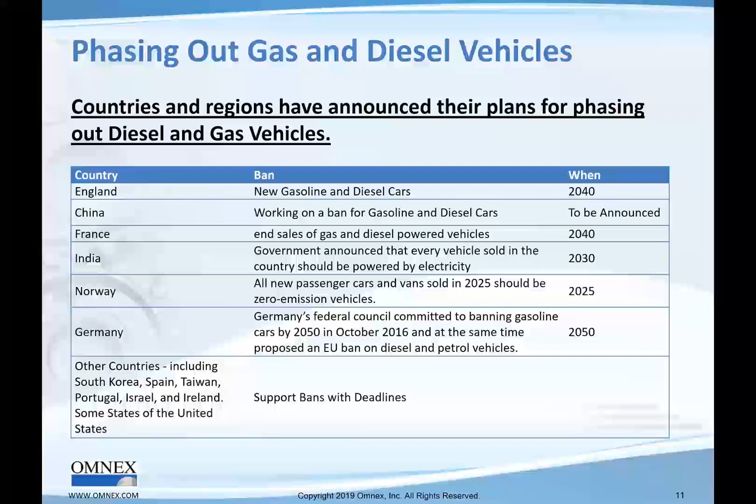Well, if that's all there was, it would be fine. But here's news from the 2 largest car makers in the world: GM has announced it's going all electric, and they will give up, as they say, ditch gas and diesel powered cars. We hear that from Volvo, we heard that from Porsche, we heard that from Volkswagen. So the 2 largest, GM and Volkswagen, say the next generation of combustion cars will be its last.

And by the way, where are we at? Yes, GM has a few, 2 electric vehicles, but they're planning on bringing out 20 new electric vehicle models by 2023. And they're trying to conserve their cash because they're going to have to put all this money into where they see the market is going. What then about autonomous?

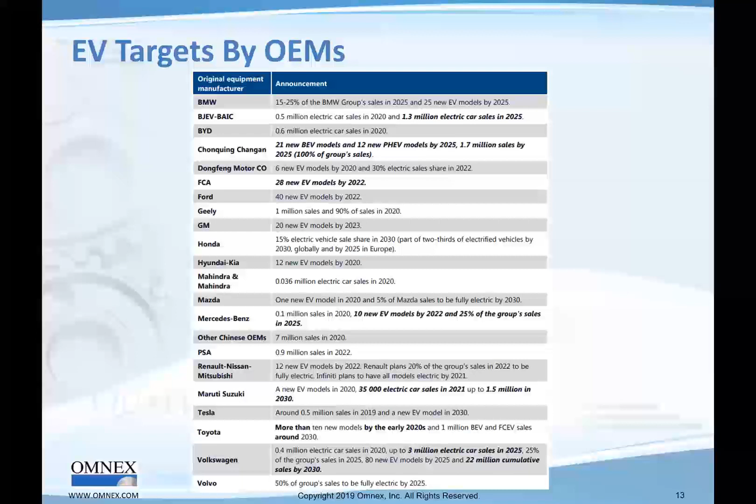Well, let's hold off on that, but let's keep that in mind. What is going on in autonomous cars? So before we go there, what's been happening in the automotive industry currently and the last, let's say, 10 years is that mechatronic systems, electronics and electrical functionality has been added, and a lot of safety functionality has been brought in.

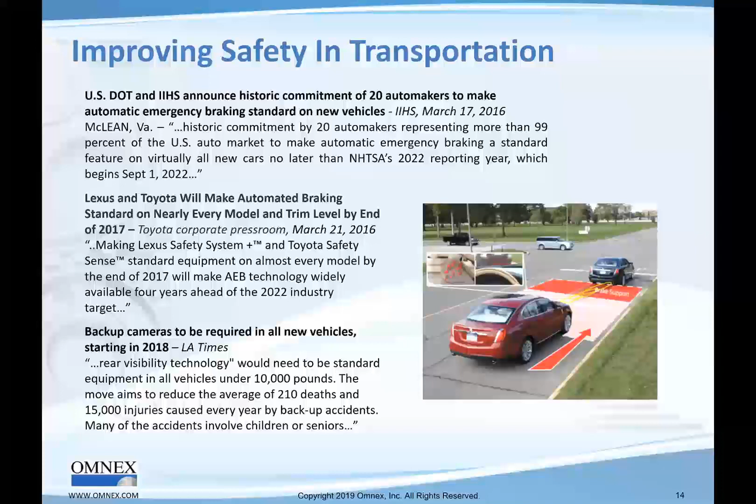This led to the announcement in 2016 between the U.S. Department of Transportation and 20 automakers that they'll bring in AEB, automatic emergency braking, and backup cameras so that cars don't injure children or seniors. In fact, I have a slide a little bit later looking at the path to autonomous cars. That path actually starts with this incorporation of electronics and safety product functionality into the car. So keep that in mind as I move forward.

So, of course, going hand in hand with that, with this idea of bringing in technology, is the big shift from 2020, where the electronics and software is, let's say, 35% or 33%, all the way to where it hits 50% by 2030. And that's a whole bunch of billions of dollars that'll get added to electronics and software sectors of the market. So if you're still designing mechanical products, that part of the market is going to shrink. You're still going to need some mechanical product for electric vehicles and autonomous, but more than ever, we need to bring hardware and software design into our organizations.

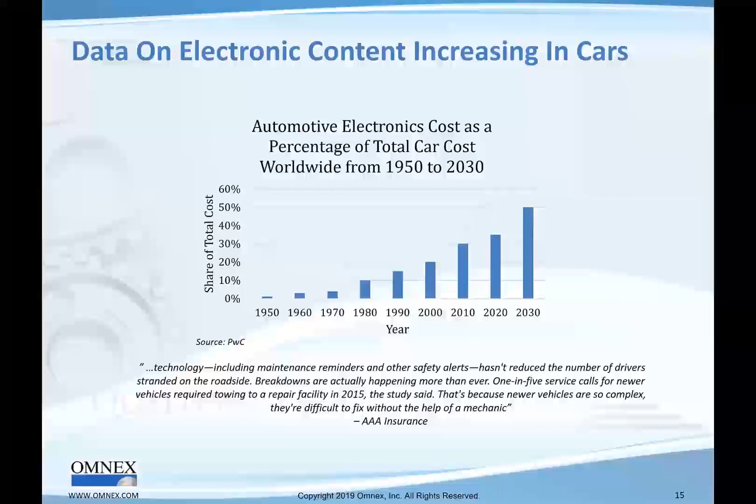Those of you listening, if you have been brought up in mechanical systems, we need to make a shift into understanding how software works and hardware works. I don't know if I'll get a chance to say this... well, let me see here. I do get a chance to talk about software, I'll say it then. So as you might imagine, the warranty recalls in software have gone up.

In fact, recently I worked with one of the truck OEMs who told me they're seeing 50% of their recall and warranty being software as a root cause. That's why we said in the paper 15 to 50%. So we're not doing such a good job incorporating hardware and software, and especially software.

So I'll say it now. It has been my experience, since the mid-2000s, in the companies that I work with — I may or may not have told you, Omnex played a big part in the ISO TS 16949 version for the semiconductor supplement, and because of our involvement with SAC, we did a lot of work in semiconductors and high tech — I noticed groups of software people often excluded from audits.

And then we would audit them and find out they had no quality management system. Of course, that's changed since 2006.

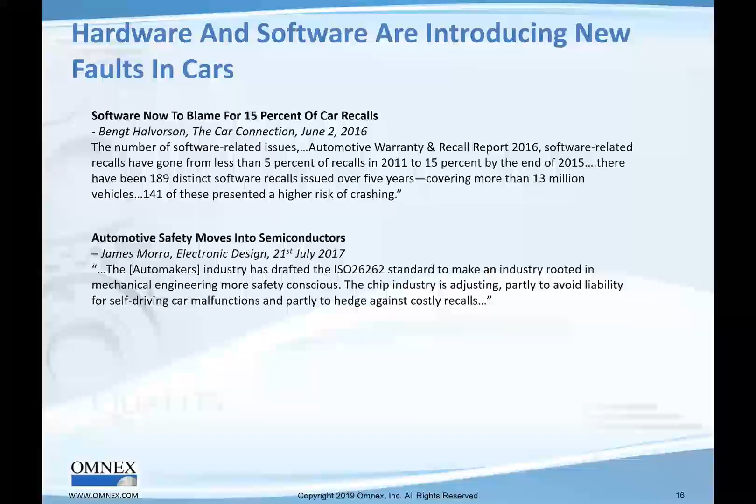Software now, the software part of the organization and the hardware part of our organizations are growing in leaps and bounds, especially software. I'll tell you about software and autonomous cars in a little while. But let me just say that with this growth in software, we're still treating software as a stepchild outside the realm of how we do new product development. So there's a long way for us to go in terms of integrating software, hardware, and systems.

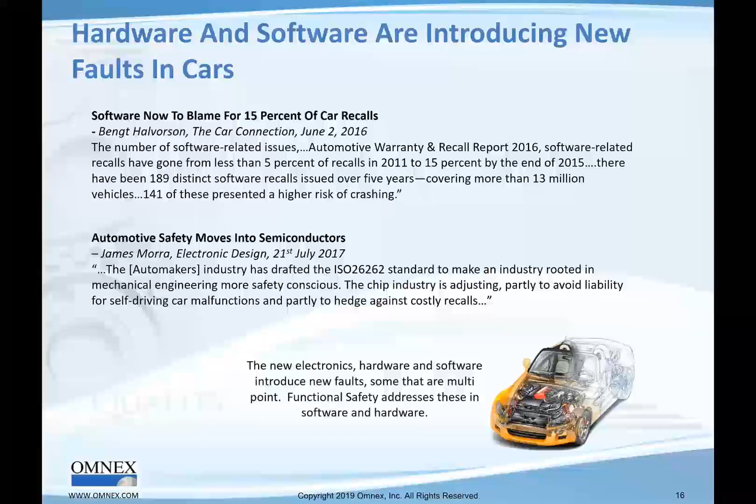All right, what can we say? There is an evolution from electric to autonomous. Forget exactly which article I talked about, who are the leaders right now in going towards autonomous. Of course, Tesla gets a lot of press, and so is General Motors' Super Cruise. It's doing wonderfully well on the highways, but they're doing it on a gasoline engine, and of course they're going to have to move that to the electric vehicle. We're all going to go autonomous on electric vehicles in the future. So there will be a shift from electric to autonomous.

Once we hit level 4 and level 5, there will be a shift to what is called mobility as a service, which is the Ubers and the Lyfts, which will gain importance. There's a thought, not just a thought, it's been there for a while, that there will be a shift from people buying cars to people using cars as needed. The idea is cars are available for 24 hours, but typically most of us who use a car daily use it for 1 or 2 hours at the most. So the idea is using the car the other 22 hours — when cars completely go autonomous, all of us will call a car to our doorstep, take a trip, and then it'll go wait for somebody else to use it. That market is called mobility as a service, and it's projected to be $1.5 trillion by 2030. By the way, there's an increase in revenue.

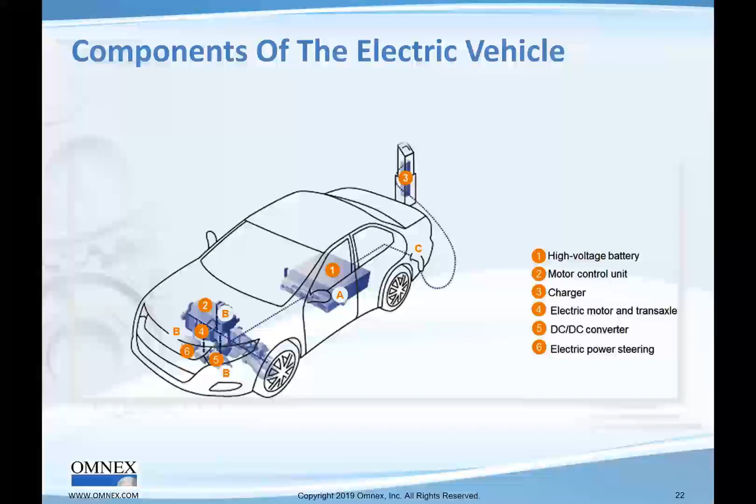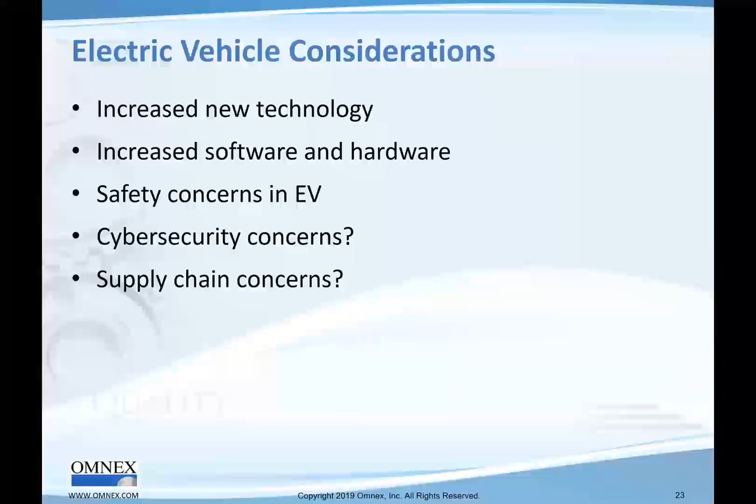So what are the EV basics? Number one, this is a high voltage vehicle with a high voltage battery, motor control unit, charger. Remember the chargers outside need to be all over, everywhere, so we can go charge it. And what does it bring in? It brings in its own considerations - new technology, increased software and hardware, safety concerns, cybersecurity concerns, supply chain concerns. So there are many different things that we didn't have before.

Could the electric vehicle have unintended acceleration? Yes. Could it have a shock, because it's high voltage - if you had an accident, the chassis could get in touch with the high voltage system and somebody could be electrocuted, or just by some bad design, the battery could end up electrocuting the driver. Or combust - explosion, battery fire, and so on. Of course, you can still have brake failures.

The big concern also is sudden deceleration. Is sudden deceleration such an issue? Yes. If you're going on the highway and you suddenly decelerate, somebody could come and hit you. It's what we call an ASIL C or ASIL D event.

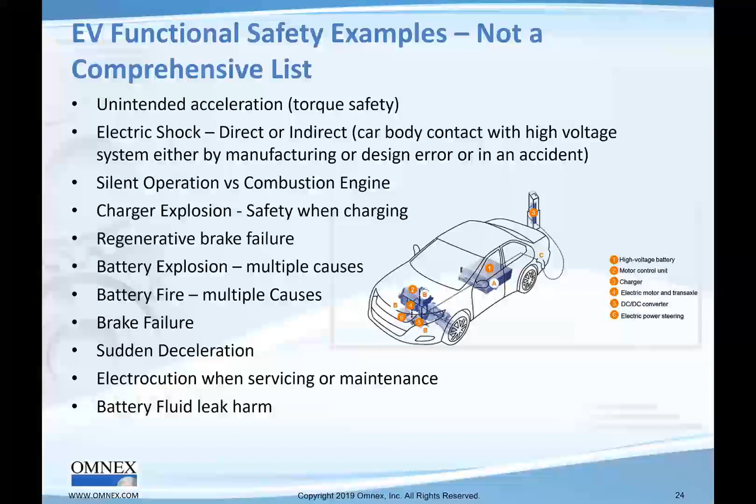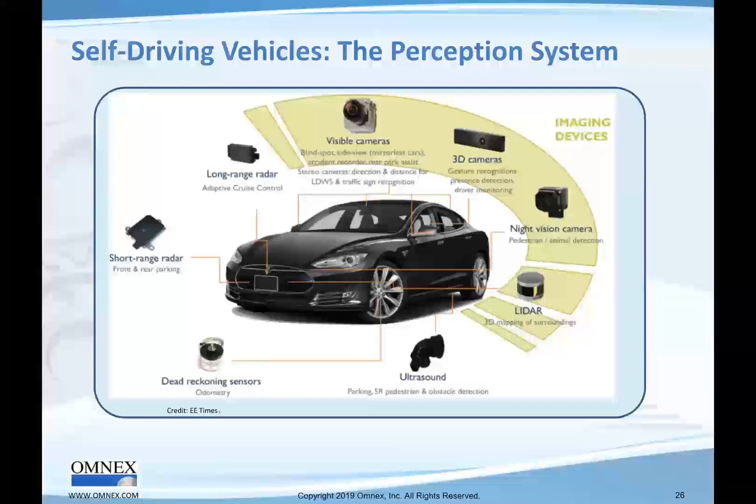So there's the electric vehicle. All future vehicles will be electric vehicles, and autonomous cars on top of that. What about the autonomous car? Lots of different cameras, sensors, radars, ultrasound. Why? Because a self-driving vehicle needs a perception system.

Right now, we are seeing people trying to come up with level 3 cars. I'll explain level 3 and all these in a second, but let me talk a little bit about the difference between level 4 and level 5.

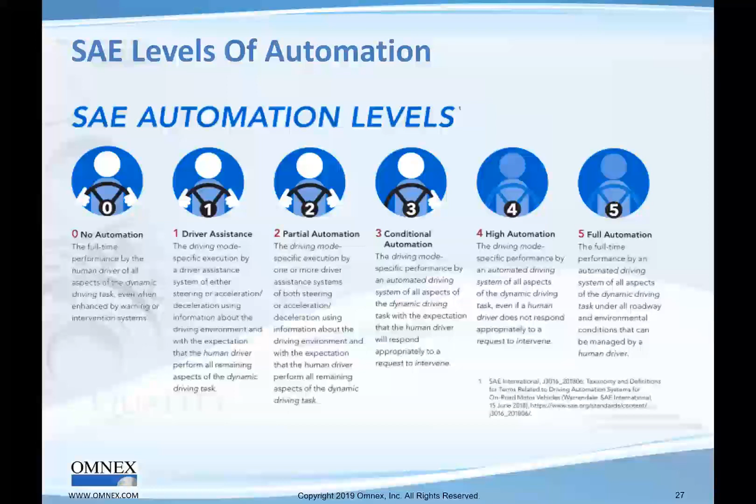When there's a problem, level 3 will go to the driver. So it's drive mode specific performance by an automated driving system, and if there's a problem, it'll ask the driver to intervene. You could say the highway driving of the Cadillac with Super Cruise is a level 3.

The difference between level 4 and level 5 - you can see level 4 and level 5 look the same, but it's some versus all. That's the big difference, what they call operational ODDs, operational design domains, which means level 4 vehicles are under a very specific scope, meaning it's maybe just highway driving, or taking people around a route in a university, or inside a mall. All that is level 4 if it's completely automated.

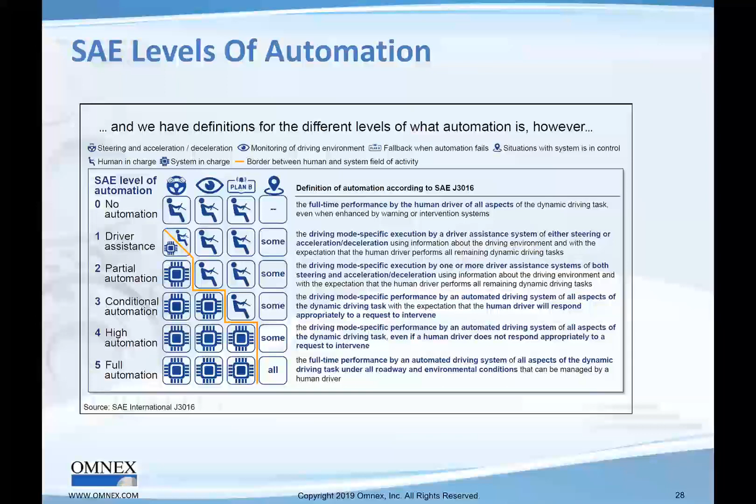So airbags can injure people and so on. And of course, there's the danger of collision from behind. That's the challenge of going from level 4 to level 5.

Look at the amount of automation - sensors, radars, cameras, 28 to 32 for level 5. And as you go further in terms of a car being able to see everything, can you imagine the amount of software we need? So people are using machine learning and AI for capturing scenarios and telling the car what to do. And of course, there's an infinite number of scenarios.

I guess what people are arguing is that as long as you get the autonomous car safe enough - meaning safer than current safety levels - then you can start going to level 5, even though level 5 is not perfect. I could talk a little bit more about that in terms of what people are seeing.

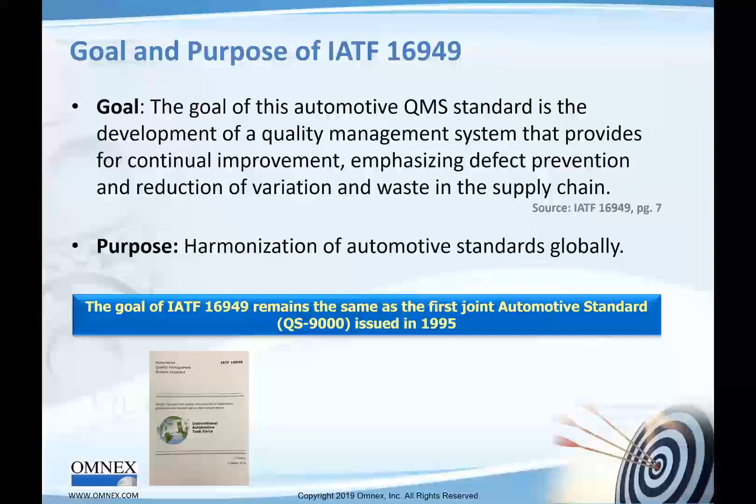The V model needs to come in. Several new changes need to come in, not only the IATF 16949, but the APQP and the PPAP need to change. The FMEA has already changed to the AIAG-VDA, and we'll mention the AIAG-VDA is a methodology that really supports the system structure. In systems engineering, the system hardware software evolution in terms of design.

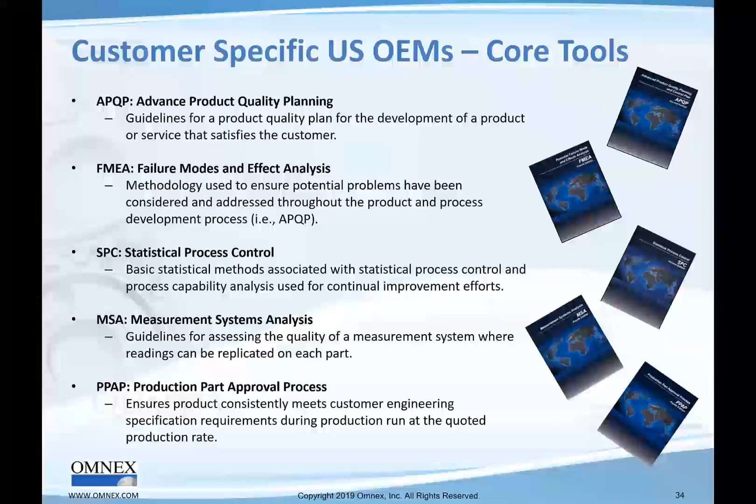Keep that in mind when you do AIAG-VDA and any of these other standards. You have to change the way you do design, and you have to structure your design. All right, let's go on.

I'll just mention also the PPAP. It's very old. It was formulated before 1995, actually. Okay, and Ford's ISIR became PPAP, the production part approval process, and it is really there for mechanical products, and it needs to change.

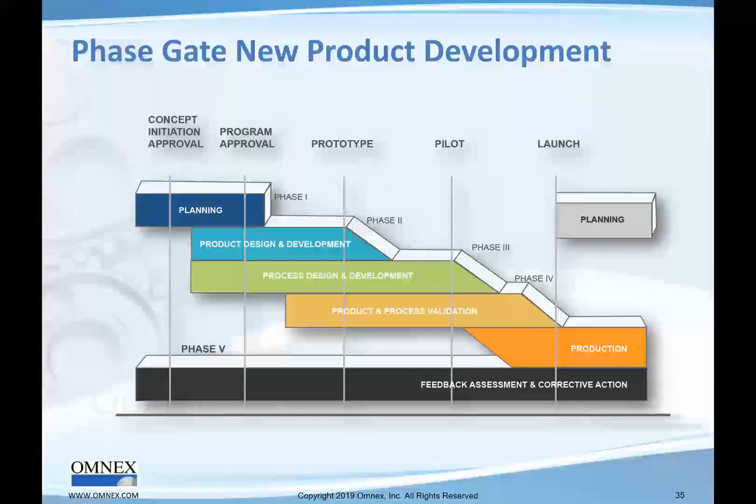If you looked at my paper, this is the phase gate new product development process. Most of these standards I'm talking about is focused on phase 2, product design. Okay, so suddenly the product design and APQP, 8.3 in IATF 16949 needs to change quite a bit.

All right. I have been giving, maybe I've given 3 presentations like this already, Dirk. I am not sure. I'm giving gold here, diamonds, and I'm not sure my audience is really understanding the importance of what I have to share with them. And this is one of those very important slides in terms of understanding.

People are struggling right now how to do the V model. Of course, you need software, and every software package out there does not meet these requirements. So this is something I saw and Omnex saw a couple of years ago. So, of course, Omnex's AQuA Pro meets these requirements and helps you meet this requirements decomposition and the engineering V.

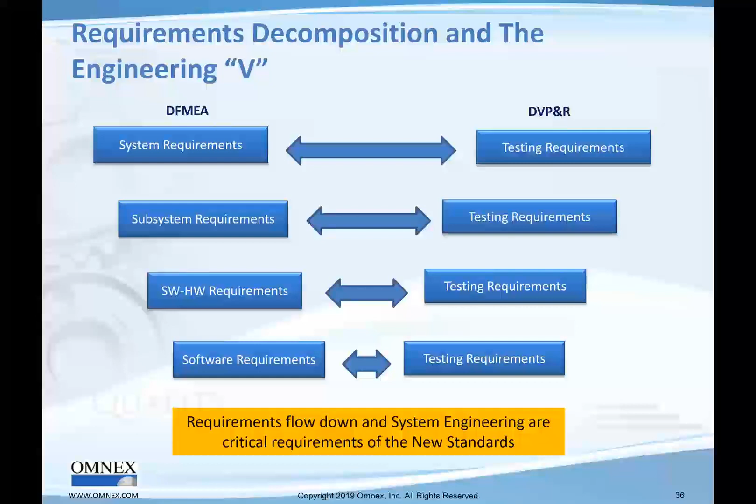That's absolutely important. So we have about 15 minutes, and we'll take a few questions. But let me walk through these standards.

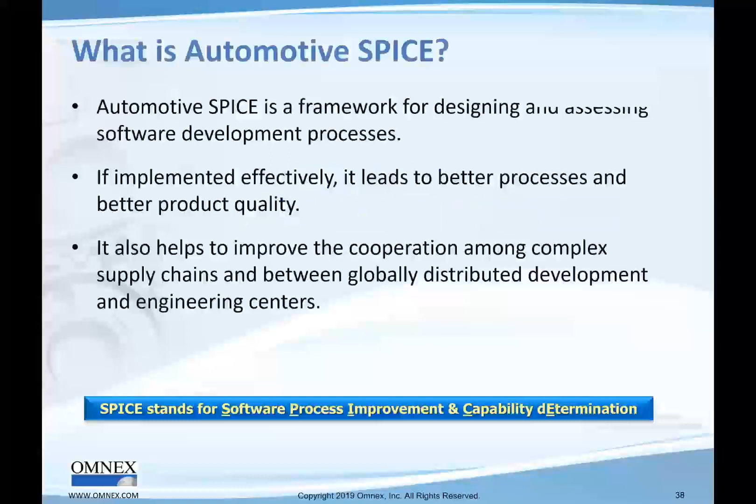First, Automotive SPICE. What is it? It's a framework focused on software, but it starts with the system, because the software requirements have to be linked to the system requirements. Folks, this means, like functional safety is only a subset of the requirements that are linked to a safety goal. In ASPICE, it's all the requirements.

It needs to be decomposed into the architectural requirements, and from there, the software requirements, SWE1 process, needs to link atomically to each of the system design, and then the architectural design and the detailed design. What am I finding when I do my audits and assessments? There are companies doing software design right from SYS.2, meaning from requirements. All they have is system requirements, and they're doing the unit design from there.

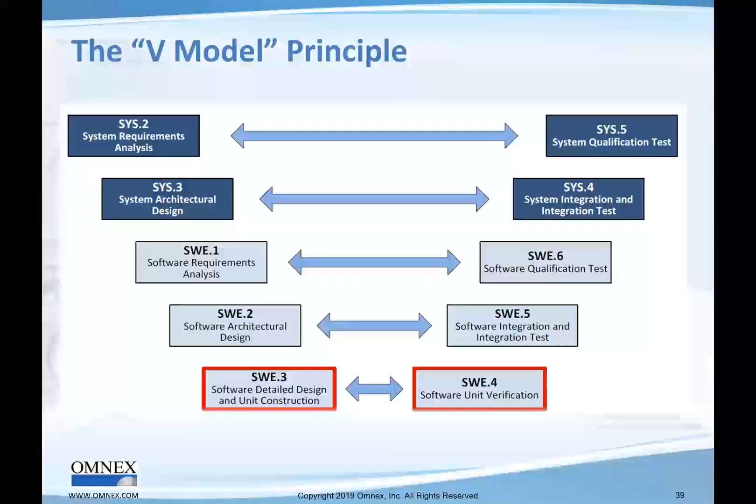So you have not only these requirements on the right-hand side, you have the testing that takes place from unit verification that the programmer does in software, into integration testing, hardware and software, qualification and system integration, and so on. But the bottom line is, if you don't have this requirements decomposition at every level, you cannot have testing at every level. So the V model requirements are very important.

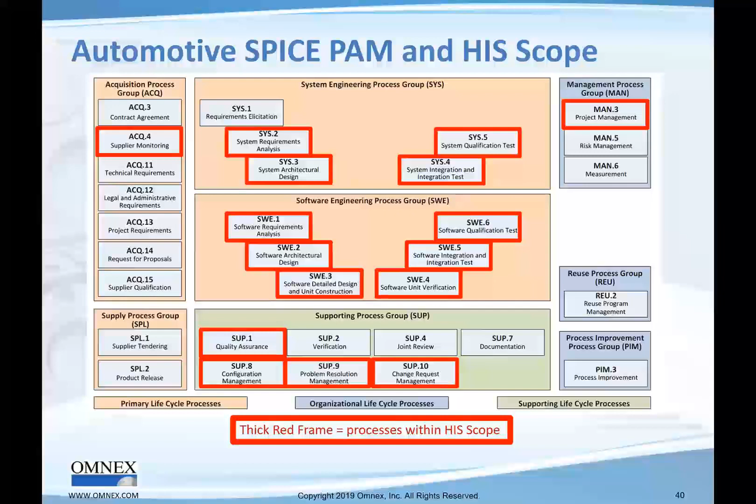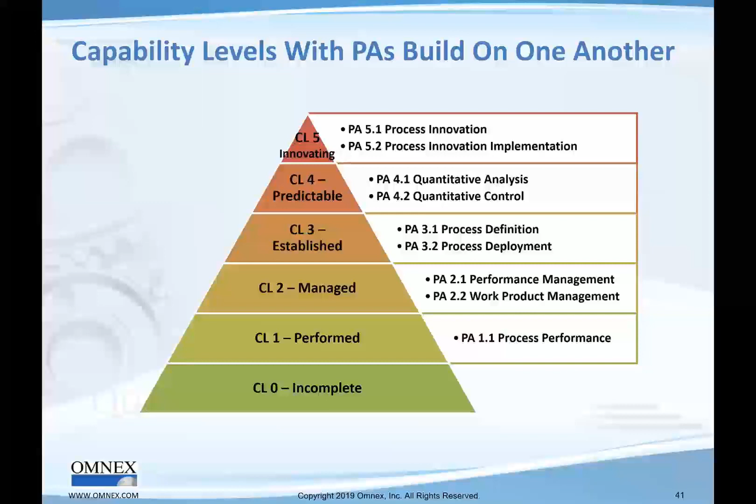Here is that V that I showed you, it shows up like this in the ASPICE standard. The ones in red are what's called HIS scope, which is predominantly what the OEMs are asking for, used to be called the VDA scope. 16 processes out of the 32 processes need to meet a maturity level of at least 2, and they would prefer you work your way into maturity level 3, meaning the whole organization works like that, not just the projects.

That's ASPICE. Next, of course, 26262. All of us know a little bit more about 26262 today. As I mentioned, it's the oldest of the standards. ASPICE was also there for quite a bit, but we in the automotive industry in the USA didn't look at ASPICE all that much until IATF 16949 required embedded software inside the organization and suppliers to adopt a maturity level process like SPICE or CMMI. That is when we realized very quickly ASPICE was the way to go.

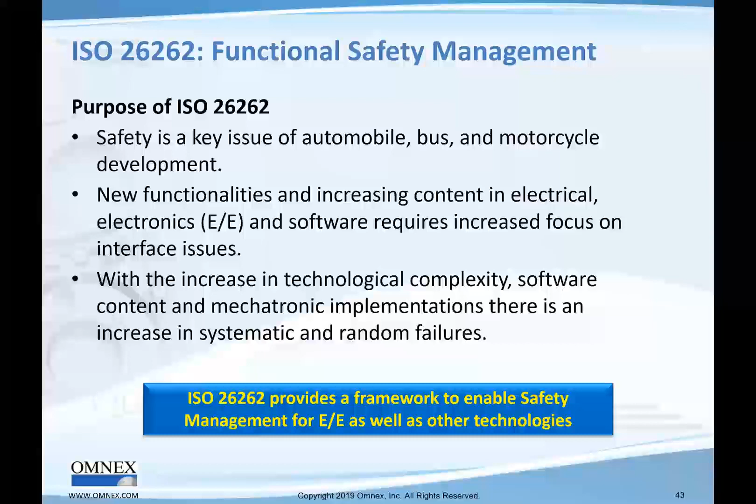And so here's 26262, focused on product safety, and focused on just electrical, electronics and software in the organization. What's the issue? You saw the roadmap. With all this technological complexity, there are an increased number of systematic and random failures coming in. So you need a methodology that really takes care of ensuring safety in the product.

I'm not going to go through all of this, but I'll tell you the most important things. Number one, Part 2 and Part 8 integrate with your business management systems. You can think of it as IATF 16949 - it adds additional shalls to IATF 16949. Part 4, 5, and 6 add to new product development processes at the system level, hardware level, and software level.

Number one, you need to realize you need systems engineers. Everything starts with the systems engineers. We're finding a lack of this understanding in Tier 1s as we work with them.

Then what can we say? The concept phase is typically a missed phase, and that has to start maybe even before the sale, right in the very beginning as you think of your new product. For the first iteration of the new product, you need to have a concept phase, and then you can just do impact analysis in subsequent generations of that same product. If you have never done 26262, you need to do the concept phase as part of the first phase.

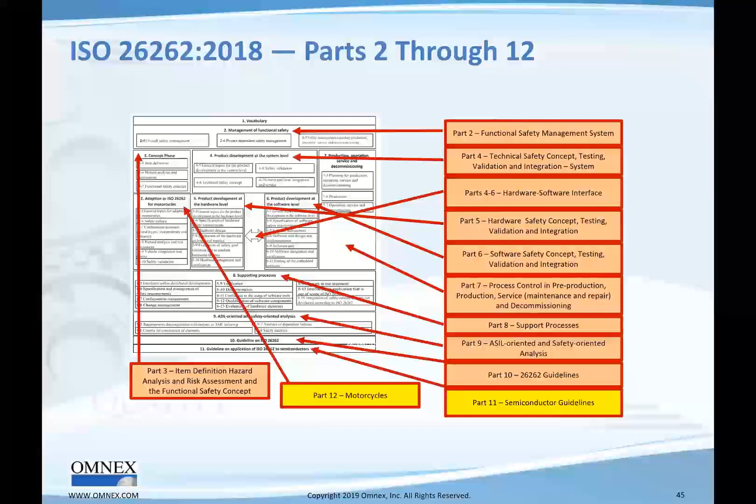Also, 26262:2018, the second edition of 26262, has now opened it up to the truck industry, the motorcycle industry, and also has guidance for semiconductors who have embraced it in a big way. Why should semiconductors adopt this and all these levers? Only because you saw how many sensors, cameras, radars, lidars the autonomous car is going to take in, and how much more electronics is in a new car. So many new entrants are coming in - somebody who was in the LiDAR industry told me there's 36 new LiDAR companies.

Then we have something called SOTIF. So 26262 designs the product to meet the functionality, but at times there are functional insufficiencies and misuse. Let me give you an example of a functional insufficiency.

Two weeks ago, I just bought a brand new car, the top of the line of a very large OEM, so I expected everything to work wonderfully. I've got this habit of putting my key in my briefcase. So I came to this car - it had a kick sensor. I'm using this example, a kick sensor, because it's such a small system or subsystem of a vehicle.

So I went and did a kick sensor, I've seen that in commercials. The trunk opens, and it senses the key because I was close enough. I put the bag in, kicked it again, it closed, and I go to open the door - it won't open. Why? My key is in the trunk. So I go back and try kicking it, it won't open.

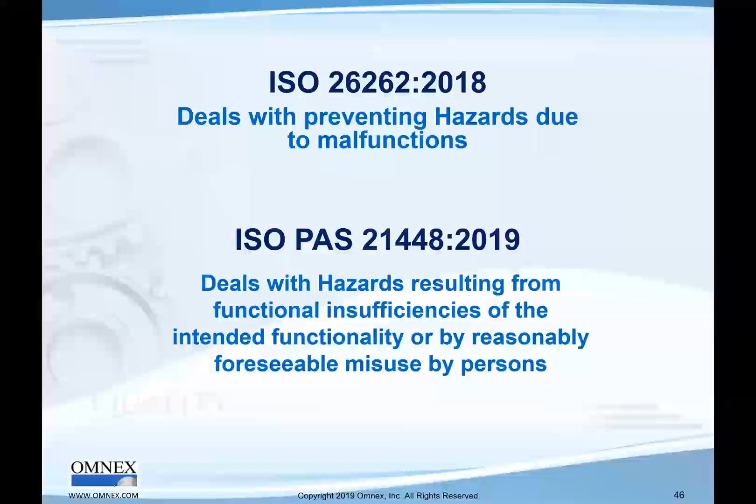And 21448 SOTIF helps you do that. Why especially I wanted to tell you what a kick sensor is: there's this idea that SOTIF is only for OEMs. And indeed, all the scenarios we're talking about, SOTIF is all about level 4 and level 5, but of course every system provider has SOTIF to contemplate, they just don't know it.

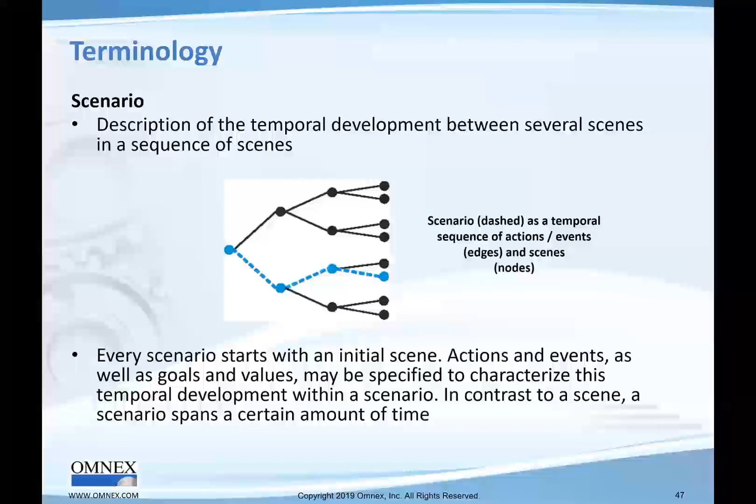So the whole idea of the scenario is a sequence of several scenes, and a trigger that triggers the scenario. Here's a triggering event, a specific condition of a driving scenario. Example: while operating on a highway, a vehicle's AEB system misidentifies a road sign as a lead vehicle, and it dramatically brakes, resulting in a collision because of this triggering event and this scenario of misidentifying a road sign.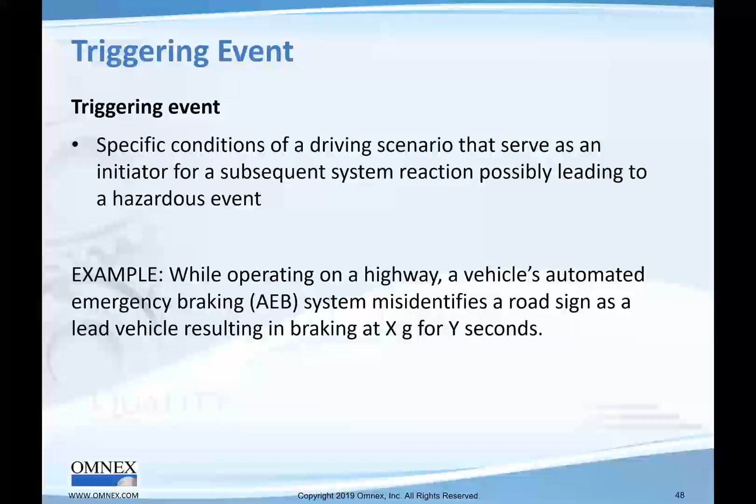Okay, so that's a specific scenario the car needs to take into consideration, just like the kick sensor had to take into account the idea that the key might be in the trunk of the car. All right, next we have cybersecurity.

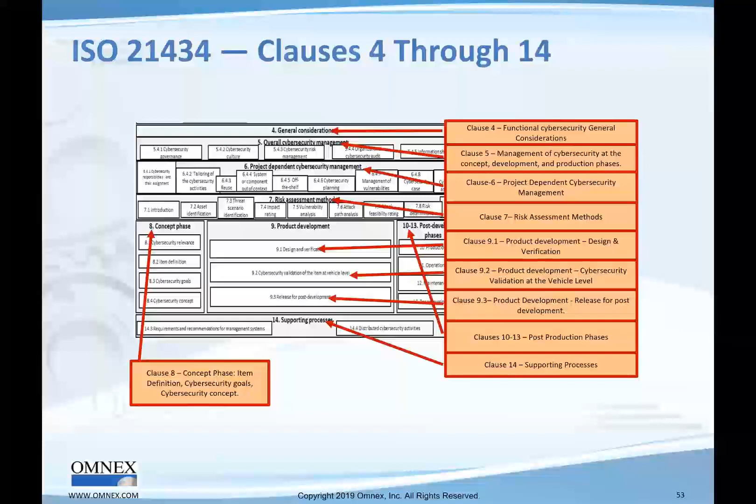So we have the TARA coming up with the cybersecurity concept, just like in the functional safety concept, where you identify CALs and come up with your cybersecurity requirements. And both your functional safety requirements and cybersecurity requirements update system requirements.

A cybersecurity requirement or a threat, a hazard, could be a safety hazard also, by the way, but they don't all need to be safety hazards. But at the end of the day, you have system requirements, which are functional safety requirements and cybersecurity requirements, which then you have to design into your vehicle, your system, your hardware, and your software.

So as we mentioned, it's still under development, and it is similar in compliance to ISO 26262.

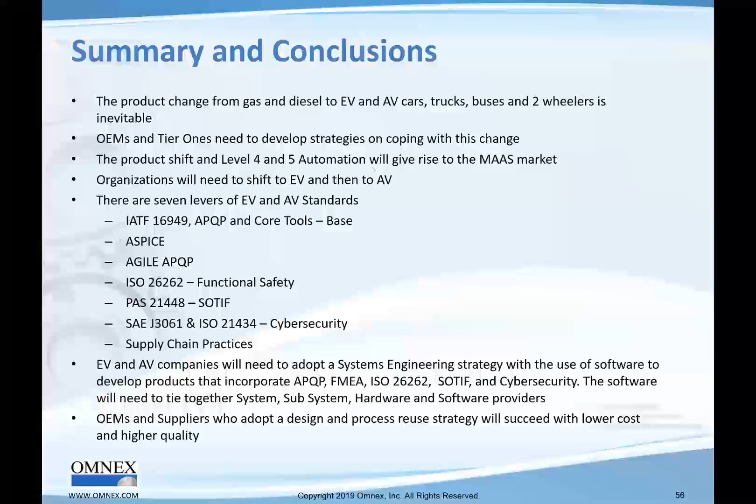So that is the webinar today, folks. Just to remind you, Omnex does audits, implementations, and training.

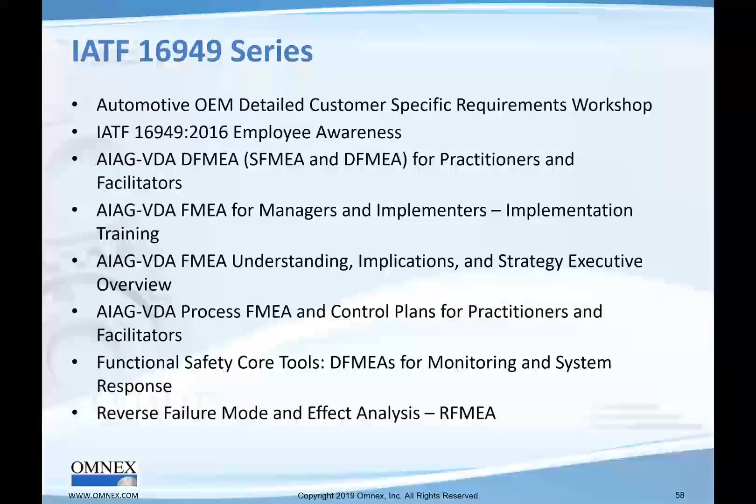Here's some of the training we do. I think we're well known for IATF 16949. We also have Automotive SPICE, where we're doing our first intacs—meaning if you want to be an intacs auditor for ASPICE, which is like third party—we have one in November and will offer it a couple times next year. We also offer internal auditor training for ASPICE, plus SOTIF training, Agile training, and 26262 training. We have a lot of different classes and lots of cybersecurity courses—over 30 courses we've added as our product shifts toward the future.

We also have general training—baseline training for employees and management into this new area of autonomous and electrical vehicles, and systems engineering. And we have software, functional safety, and APQP integrated software.